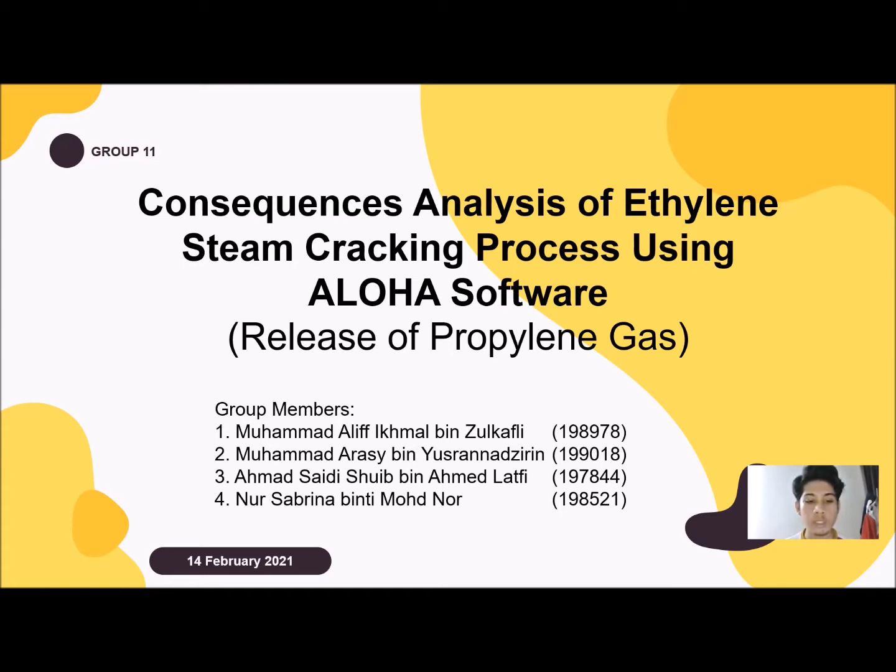So our objective of the study is to evaluate and analyze the consequences analysis based on the difference of wind speed, which is 5 miles per hour, 10 miles per hour, and 15 miles per hour, towards type of tank failure using ALOHA software. The first scenario is the leaking tank, where the chemical is not burning as it escapes into the atmosphere. Then the next scenario will be a leaking tank where the chemical is burning as a jet fire. And lastly is BLEVE, where the tank explodes and the chemical burns in a fireball.

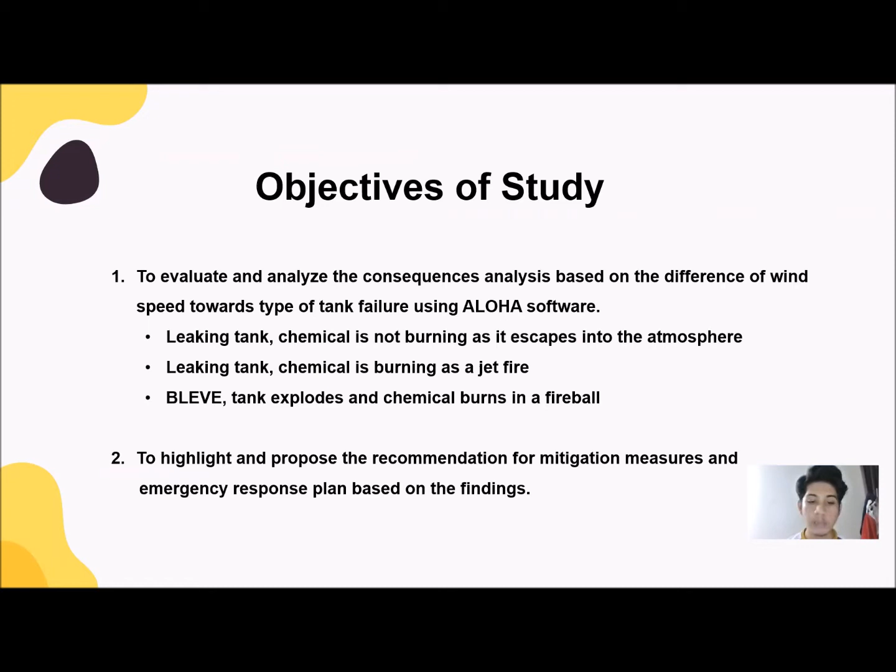And then the next objective is to highlight and propose the recommendation for mitigation measures and emergency response plan based on the findings. So as the result and also the discussion, I'm going to explain on the first scenario, which is 5 miles per hour with a leaking tank, where the chemical is not burning.

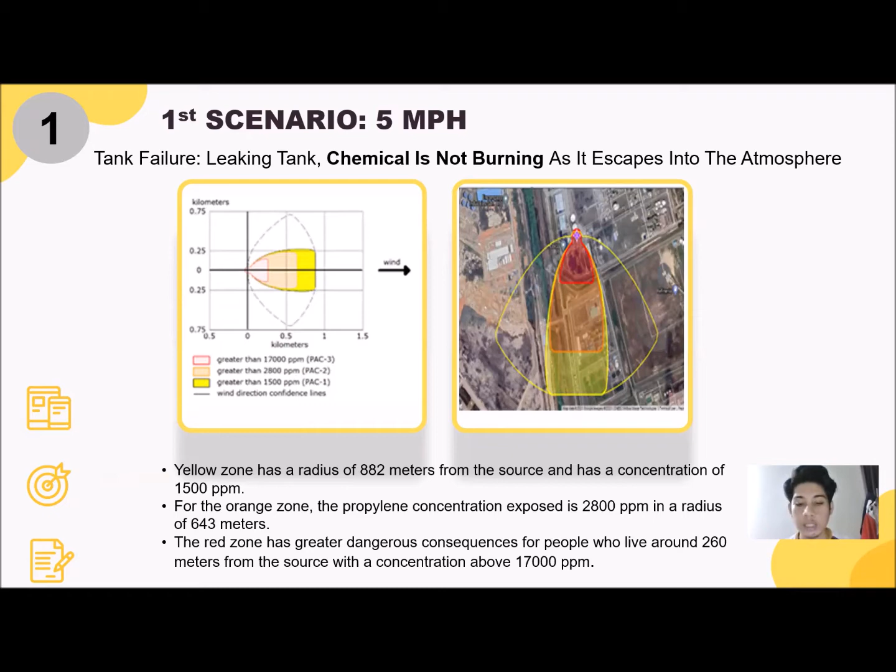And so we can see from the diagram here a concentration of 1500 ppm is in the yellow zone, which has a radius of 882 meters from the source. And then we can see from the orange zone, the propylene concentration exposed is 2800 ppm, which is in a radius of 643 meters. And then the people who live around 260 meters from the source are in the red zone, which has a greater dangerous consequence with the concentration of 17,000 ppm.

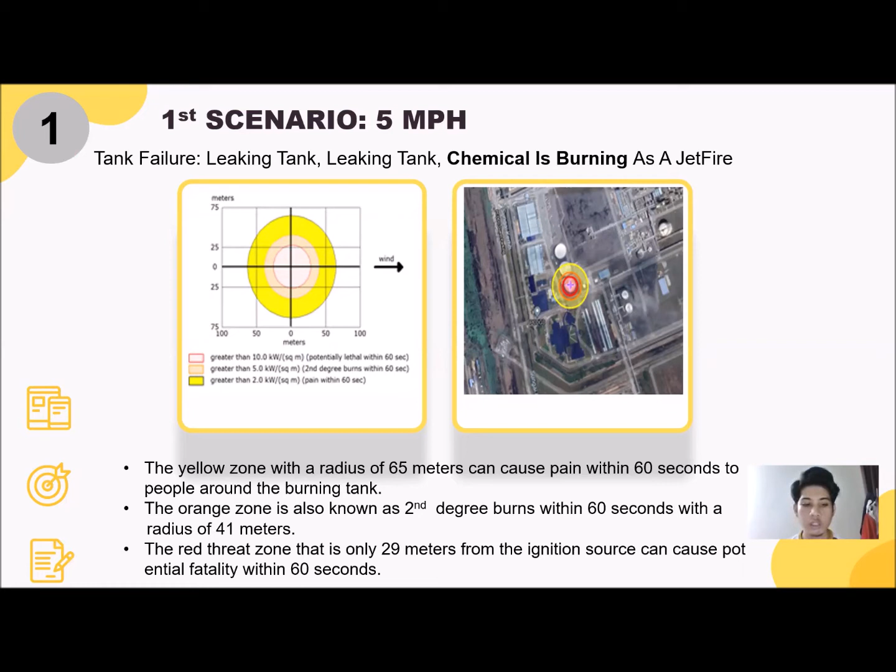And then the next one is the red zone that is only 29 meters from the ignition source, which is so dangerous to the people who live nearby and can cause potential fatality within just 60 seconds. And then the last one will be the scenario on 5 miles per hour with BLEVE tank failure.

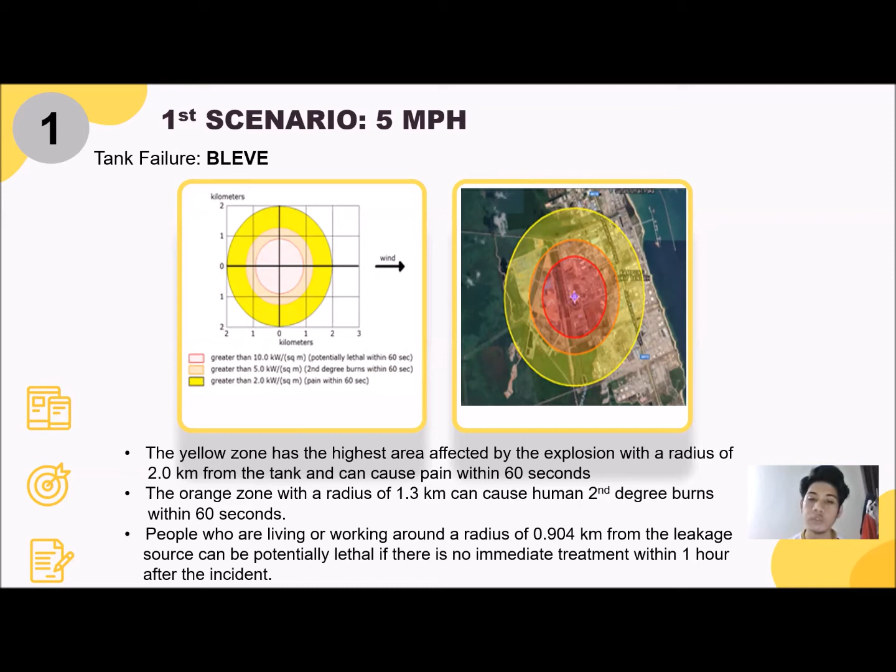And then we can see on the first zone with a radius of 2 kilometers from the tank, the yellow zone has the most area affected by the explosion, and it can cause pain within just 60 seconds. And then we can see from the orange zone, it can cause second degree burns within 60 seconds for the people who live in the radius of 1.3 kilometers. And then lastly, it is potentially lethal if there is no immediate treatment within 1 hour after the incident for the people who live or work nearby around the areas of 0.904 from the leakage.

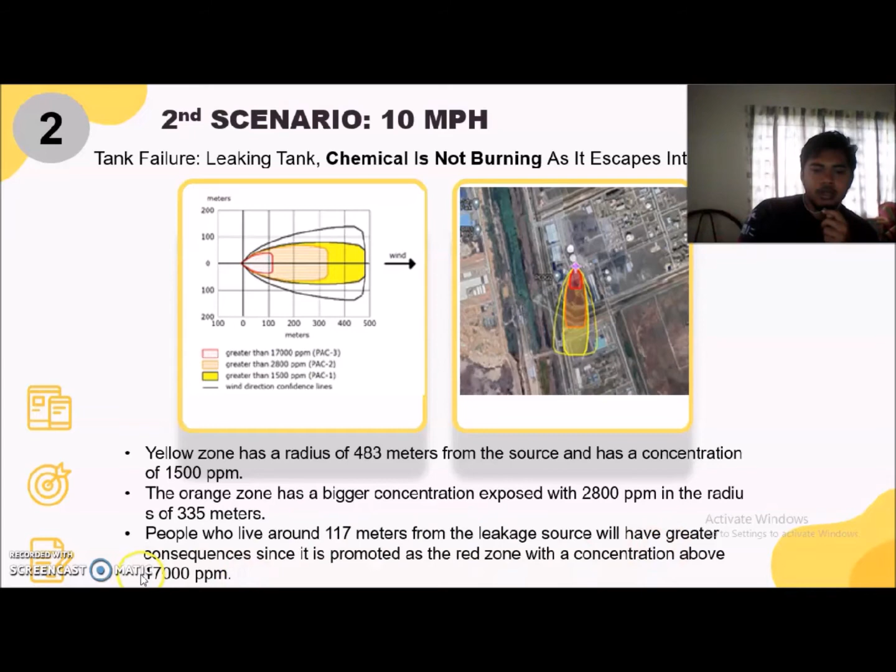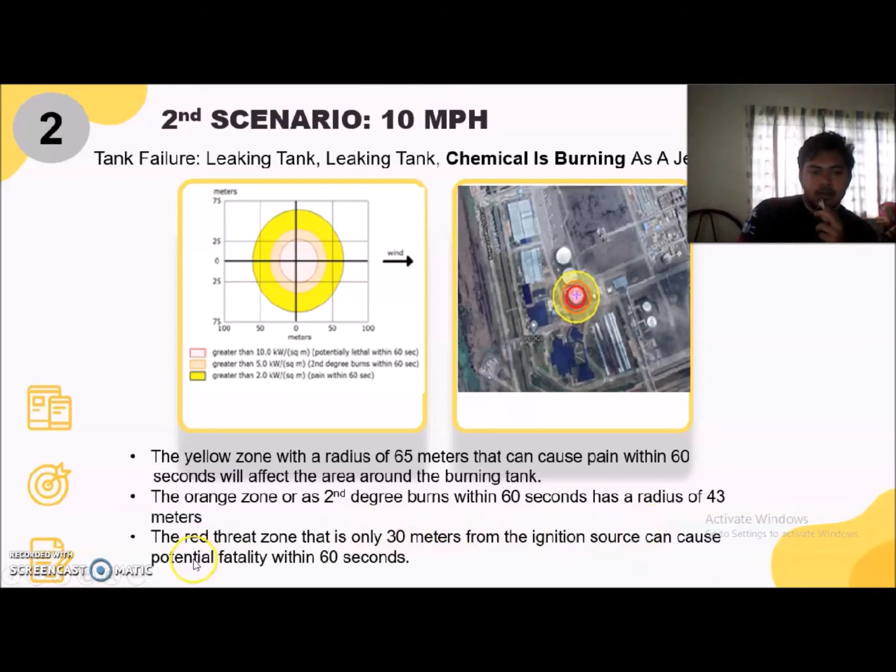Orange zone, also known as a second degree burn, has a radius of 43 meters, and the red zone is just 30 meters from the leaking tank, and this can cause potential fatality or serious injury in 60 seconds. For BLEVE, the area affected is much bigger and many people live and work around the area.

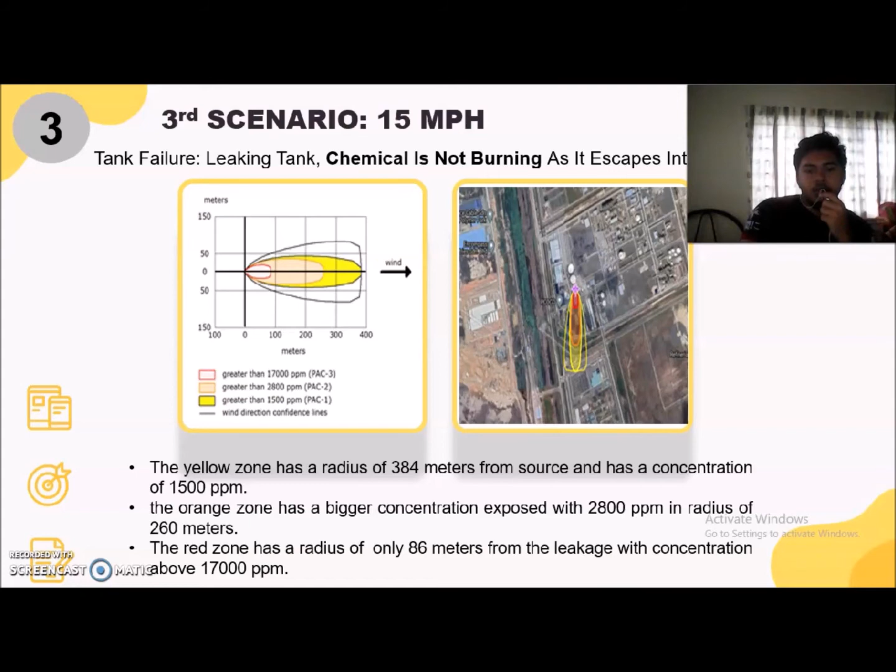The red zone has greater consequences to people living around 86 meters from the leaking tank because it has a concentration above 17,000 ppm. When the leaking tank occurs, the propylene is burned just as a jet fire because the area exposed is circled around the leaking tank.

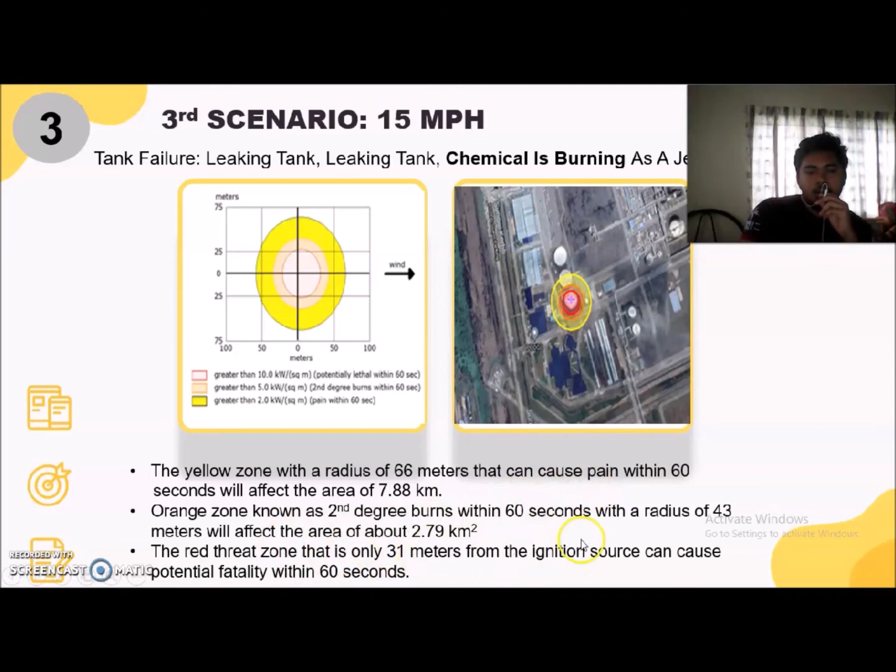Yellow zone with a radius of 66 meters can cause pain within 60 seconds from the leaking tank. Orange zone, also known as a second degree burn, has a radius of 43 meters from the leaking tank. Red zone is just 31 meters from the leaking tank, and this can cause potential fatality or serious injury in 60 seconds. For BLEVE, the area affected is much bigger and many people will be affected if the explosion occurs.

For the yellow zone, this can cause pain in 60 seconds with a 2 kilometer radius. The orange threat zone has a radius of 1.3 km, while for the red zone, people living or working around 0.904 km from the leakage source can face potentially lethal effects.

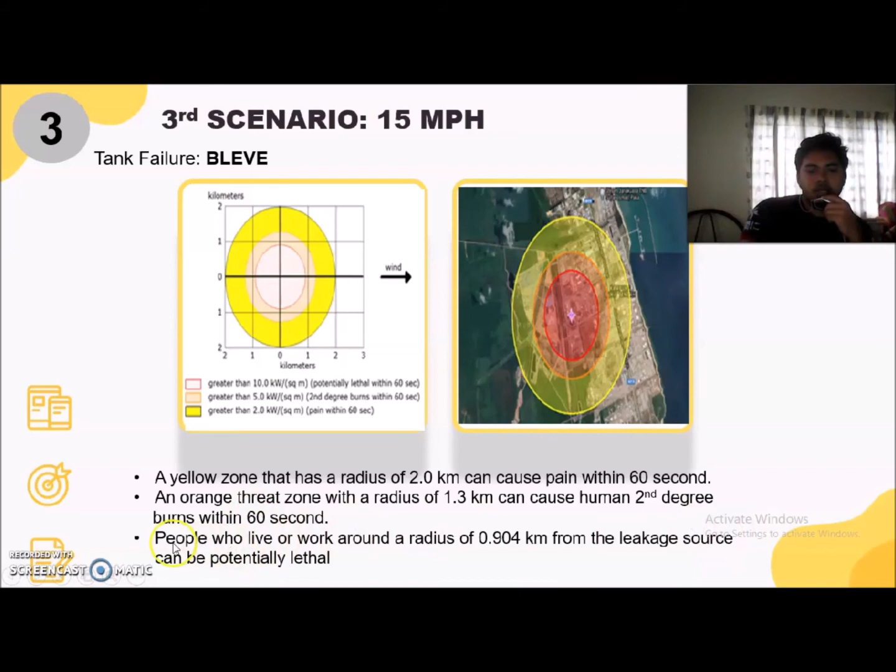Bismillahirrahmanirrahim. So next I will be presenting to you the comparison between accuracy of result, theory and limitation of theory. Although ALOHA software has the ability to run simulations for different situations, it is admitted that there are some technical weaknesses that need to be known. Even with the best possible input values, in some cases ALOHA can be inconsistent and it cannot model certain kinds of releases at all. In fact, ALOHA's concentration estimate can be less accurate when any condition exists that reduces mixing in the atmosphere.

So for the first part, the contaminant cloud does not mix easily with the surrounding air at very low wind speeds, less than 3 to 5 mph. In the chemical cloud, the gas concentration can constantly be higher than ALOHA predicts, especially near the source. In this project case, an assumption is made that the ALOHA simulation achieved by setting the wind speed at 5 mph is not highly accurate due to low wind speed. In the future, another project should be assigned for bigger wind speed to achieve better accuracy and precision.

So next, ALOHA assumes that in the region downwind of a chemical spill, wind speed and direction are constant. Besides, the observed facility placement for this project is in an industrial area in Kerteh, where there are many different types of buildings and heights.

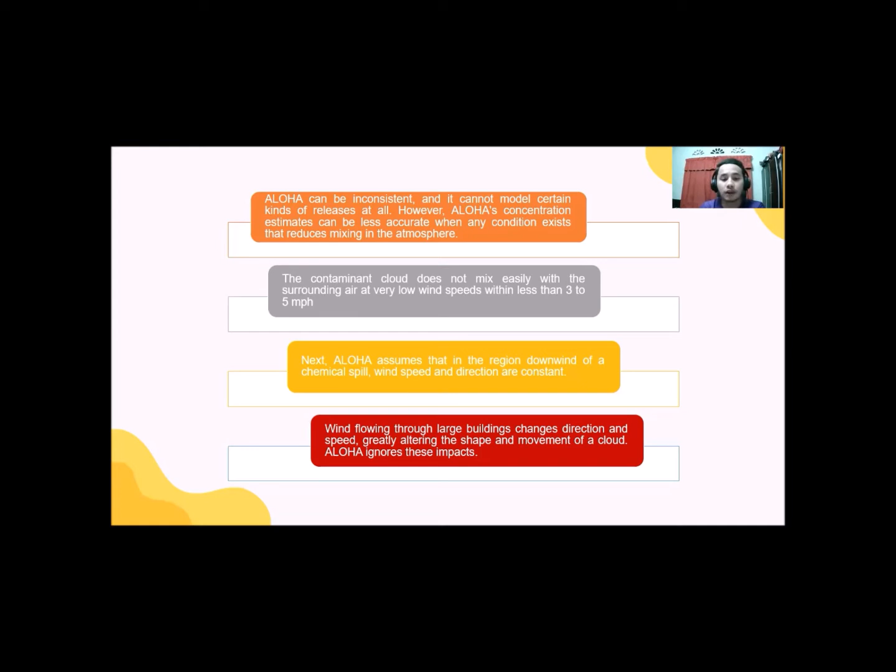So next, I will be presenting to you the comparison with literature. Earlier, a similar investigation of propylene production was conducted by several Chinese researchers at one of their largest industrial sites in West China, Qingyang. One of the researchers explained that the purpose of the research was to design daily safety management supervision that focuses on mitigation of unpredictable weather that could be the initial factor.

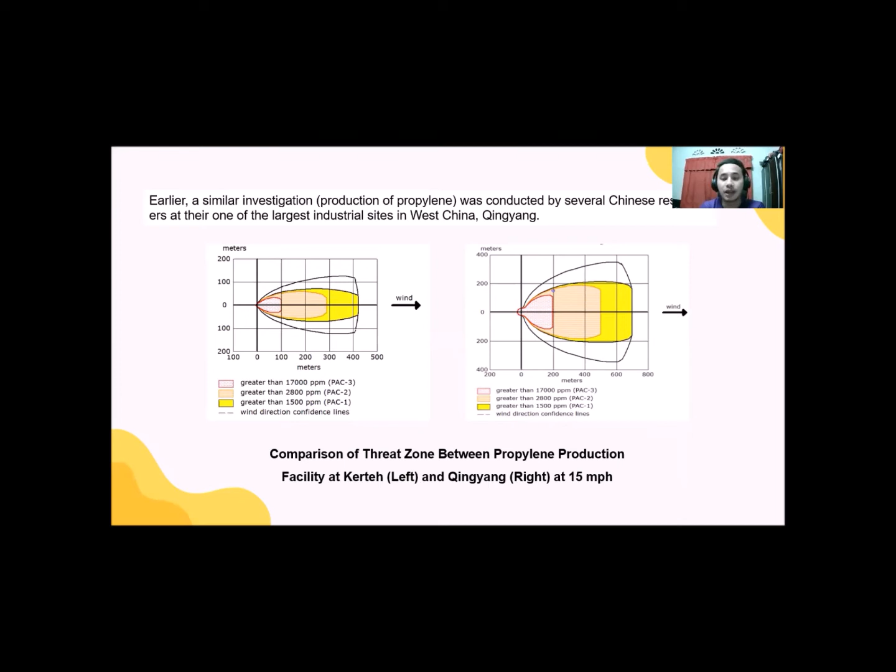So as you can see, both graphs compare the threat zones between the propylene production facility at Kerteh on the left side and Qingyang on the right side at 15 mph. This is the result gained from our investigation and another researcher's investigation.

In Kerteh, with the influence of wind direction, the concentration of propylene is in the range of only 86 meters for greater than 17,000 ppm. But for Qingyang, the radius of the red zone is a lot more than Kerteh, which is 199, almost 200 meters for greater than 17,000 ppm. So next for the orange zone, it is detected around 86 to 260 meters for greater than 2,800 ppm.

While for Qingyang, it is from almost 200 to 503 for greater than 2,800 ppm. So for the radius or yellow zone, 320 meters for greater than 1,500 ppm in Kerteh, but for Qingyang it is much farther away, 690 meters for greater than 1,500 ppm.

So the different results between the two places are due to the difference of elevation from the sea, where Kerteh is only 12.8 meters, but Qingyang is 1,398 meters, as I said before. Besides, the measurement height also varied for both places. Higher places result in more time allocated for the vapor cloud to move to the affected area with constant wind speed. If the wind speed keeps changing, people who are at a greater distance than the ALOHA software reading, in this context those who are in a safe position, need to be vigilant at any cost.

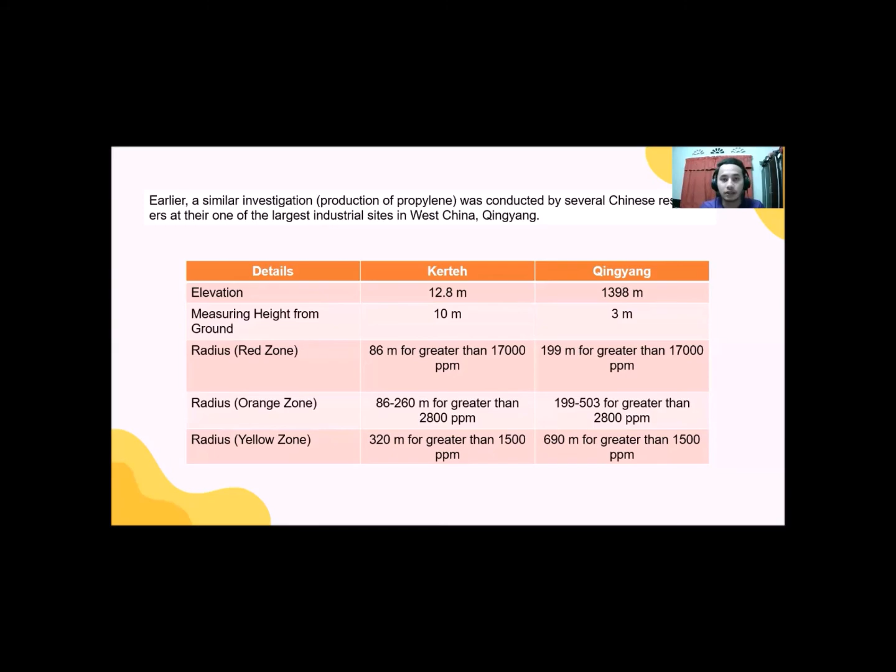Based on the simulation conducted, we are proposing three types of control in order to reduce the impact of the consequences. The first one is engineering control, where it is recommended that there should be installation of a detection system, or we call it a sensor, relief valve, blow down drum, and also inert gas system. Sensor is important to detect any uncommon reading of wind speed. Relief valve is to reduce the possibility of leakage.

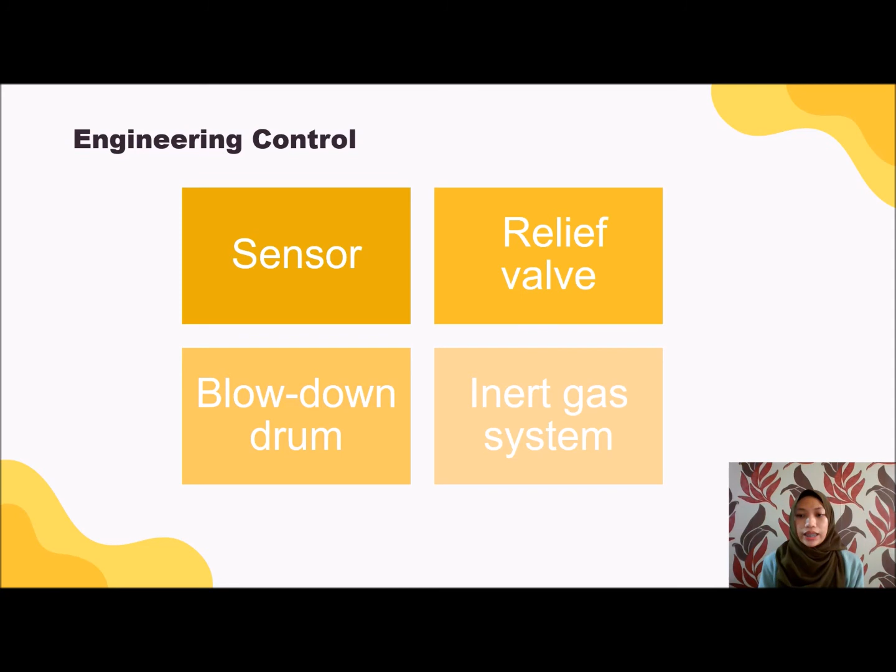Blow down drum helps whenever there is an abnormal operating condition, and then the chemicals inside the tank will be pumped into the underground safe area. And lastly, the inert gas system is important as it helps to lower the oxygen concentration inside the tank. Moving on to administrative control, it is important for the management to ensure that standard operating procedures, SOP, are implemented at all times.

Also, employees should be exposed to and go to workplace training, especially on SOP and emergency responses. This is important as they will know what to do whenever any incident happens in the future. It is also important for the facility to establish and maintain good housekeeping. This includes having scheduled inventory control, which can help to prevent storing for such a long time.

The management should also introduce a permit system where only qualified personnel are allowed to access certain areas or to handle certain specific chemicals. Not only is it important to control the facilities, but it is also important to educate the local authorities and the communities around them. So this is where the distribution of information on risks and hazards to the community is important.

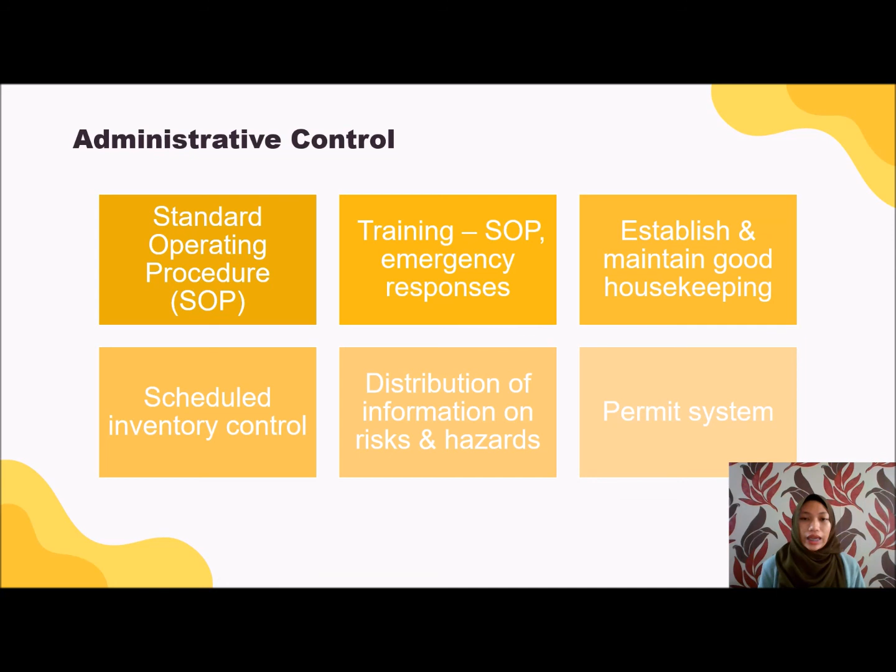This includes involving them in scheduled drills so that they will also know what will happen in case of any incidents in the future. And lastly, for personal protective equipment, PPE, as we are working with a lot of foreign substances, it is important to wash our hands regularly. It is best to avoid touching our eyes, nose, and lips.

And then self-contained breathing apparatus is important as well, and it needs to be accessible at almost all places. It is vital for the employees to use fireproof coveralls, shields, gloves, and conductive footwear, especially for those working in fire hazard processes. And lastly, fire extinguishers and fire blankets must be accessible almost everywhere in the facility, especially in the areas connected with high fire hazard.

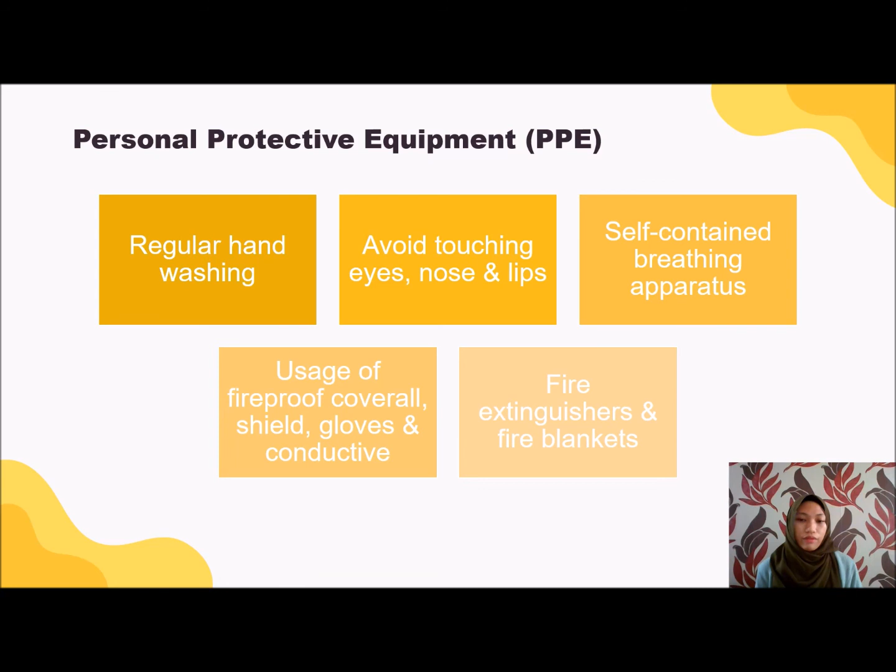We have come to the end of our presentation, so we're going to conclude the project that we have conducted. In conclusion, wind speed at 15 miles per hour is the most dangerous one, since propylene gas can spread faster due to higher speed compared to 5 and 10 miles per hour. This applies especially for the simulation of the leaking tank where the chemical is burning as a jet fire.

However, this simulation alone does not portray the real-life situation, as there might be some issues with topographical and building effects. Most industrial sites with gas dispersion will contain a number of buildings, vessels, pipelines, etc. As these buildings vary in height, they will significantly affect the airflow at levels of interest, which will interrupt the wind speed. However, ALOHA is a good software as it allows scientific research work to be expanded up to the analysis of domino effects for critical infrastructures, risk assessment, and working out actions on management of the risk.